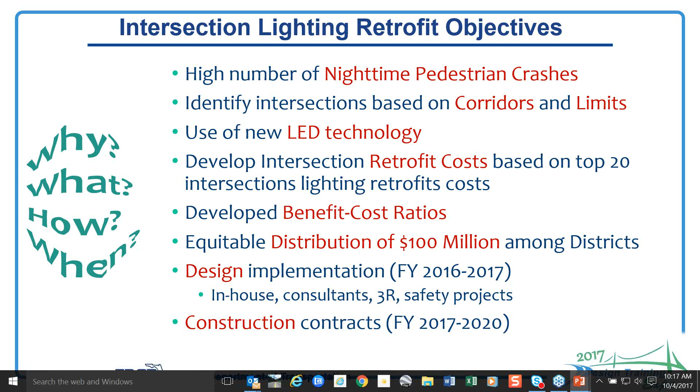that $100 million came about, and also both the design and construction implementation. This is a 5-year initiative. We are currently in the design phase. Some of these projects, depending on how fast we can put them out to construction, or if they are part of some existing 3R projects, we're going to be starting the construction phase. So that is in general what the PowerPoint presentation is going to be about.

On this slide, we can see the top 20 intersections with the highest nighttime pedestrian crashes. What we did, if you are from Florida, we have District 4, 5, 6, and 7. These are within the urban corridors. You can see the Tampa area, the Orlando, the Miami, Fort Lauderdale. All of these urban areas, they're in high density areas where there is a lot of pedestrian crashes.

We had identified 20 intersections. We collected data for 4 years from 2009 to 2013. And out of this, if you look on the right-hand side, we have the total number of crashes. All of these are pedestrian crashes that happen within a 24-hour period over 4 years. However, if we were to break down the crashes, we see that probably between 70 to 80% of those crashes are going to be nighttime pedestrian crashes. Between these crashes, we'll have injuries and we will have fatalities.

So just based on the data that we had collected for these intersections, and we worked with each one of the districts, we had determined that these intersections had a significant number of crashes. Now, the definition of a crash is that it is a random factor. And if you are familiar with the Highway Safety Manual, if you were to divide in terms of intersection crashes, perhaps on a year-time basis, maybe you will get maybe 3/4 of a person crash, 0.75 to 1.5.

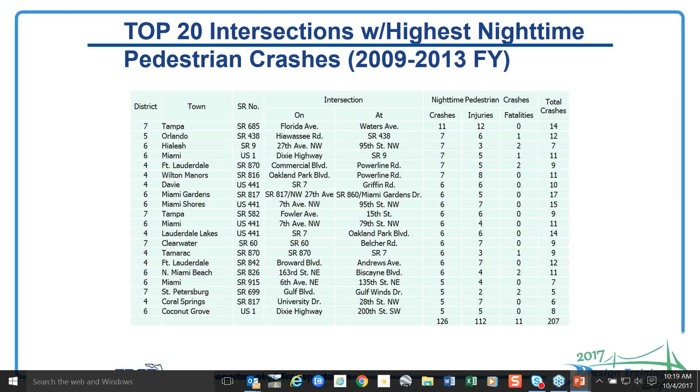So when we divide 11 crashes by 4, we know that we're getting more crashes than what is expected, and that there has to be something within the existing intersection that is more than just random crashes. So we concentrated on these intersections, and I will show you as we go through this one site why we needed to have the lighting.

So some of the data that we had collected in terms of the distribution of the pedestrian crashes, this is for the year 2013. Total number of crashes for the year was over 8,000. Then we have the injuries and the fatalities. Now these are all pedestrian crashes. However, if you can see the distribution for the fatalities that we have between nighttime and the daytime, 3/4 of the fatalities were happening during nighttime.

So we know that lighting, intersection lighting, is something that we definitely have to consider if we want to reduce our fatalities. And this is not very expensive to do. However, it has to be done, thought about, and implemented in a very systemic manner.

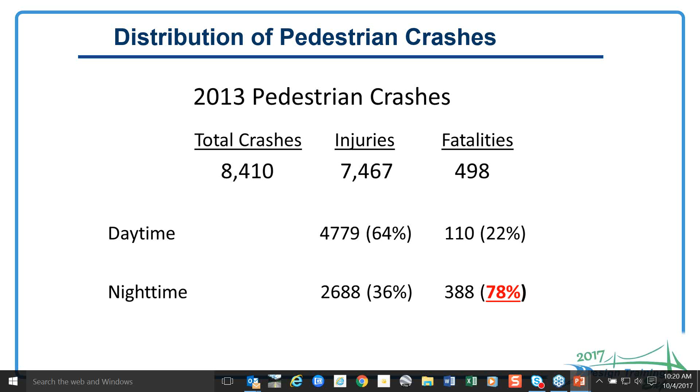So when we were talking about retrofits, the definition that we are giving the retrofits is that we have some existing signalized intersections. The majority of these corridors will have roadway lighting, but as I was mentioning, the location of the lighting was pretty much away from the intersection. So we needed to concentrate on how can we go ahead and provide lighting at the intersections.

And it was not going to be a full intersection reconstruction, especially if you have the mast arms and you need to relocate them just to comply with the new lighting design standards. So let's do the best that we can, but have some minimum illumination levels. And that's what we came about with. So as part of these 20 intersections, working with each one of the districts, we can see some of the things on average that we consider was going to be the scope of work.

Based on this average scope of work, we came up with an estimated cost. Now granted, at that time we were using high pressure sodium, so it's a little cheaper than LED. Based on our existing signalized intersections, we say on average we will need to install 3 new light poles, with an estimated cost of $4,200.

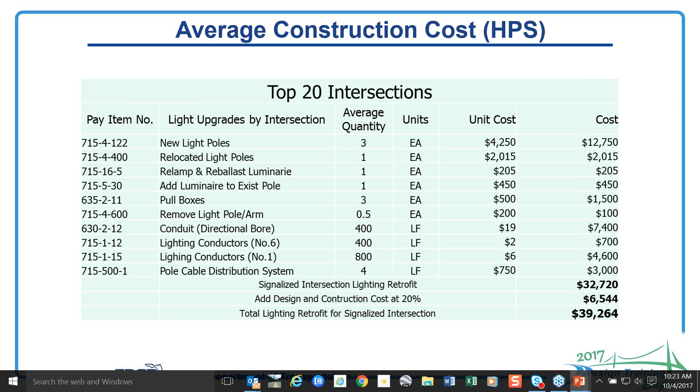So here you see our approach to this intersection. It was going to be very simple. We're going to be using some existing aerials, existing survey if we need it. As you can see, this is one of the intersections.

You can see some of the symbology. If you see the yellow luminaire, it means this is existing lighting. Now this one is close to the intersection, but it doesn't provide the illumination especially where we wanted to have it. So we have State Road 7, and also Griffin Road.

The blue legend is for the new lighting that we were providing. Now if you can see, it says we were attaching these luminaires to the existing poles. And these existing poles, this was based on span wire signal installation.

So we already had these strain concrete poles. We were attaching the luminaires to these strain concrete poles, and that was the best that we could do. We didn't install any new poles as part of this project. So this was using the high pressure sodium.

Also, I want to bring to your attention, if you can see the red dots and the dash lines, this is indicating where the pedestrians were crossing and where the crash happened. As we know, sometimes pedestrians tend to cross wherever they see a gap and not particularly using the existing crosswalks. So we do have crosswalks on all approaches.

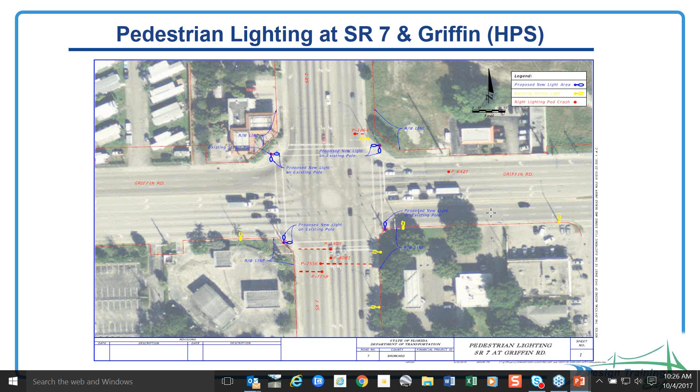So in terms of where we are right now for the lighting initiative, I want to give you the chronology of how we started. In 2014, we had programmed the top 20, and we were still using the old technology, the high pressure sodium. Then in 2016, as many states were going towards LED, we knew it was something we wanted to do for several reasons.

LED, and the technology, is more reliable. We know that for high pressure sodium, sometimes we needed to relamp every 6-7 years, and they're not as reliable in terms of the maintenance.

For a little bit of a higher price, which is dropping as technology advances, although LED is still a bit more expensive, we noticed we didn't need to change the LED luminaires maybe every 12 to 15 years. So in terms of equipment lasting and getting a better return on investment, LED was much better. It also provides a much brighter contrast because the correlated color temperature tends to be more bluish, a whitish color of light. That's a significant improvement, especially if you're using LEDs in your home or going through roadways or intersections with LED.

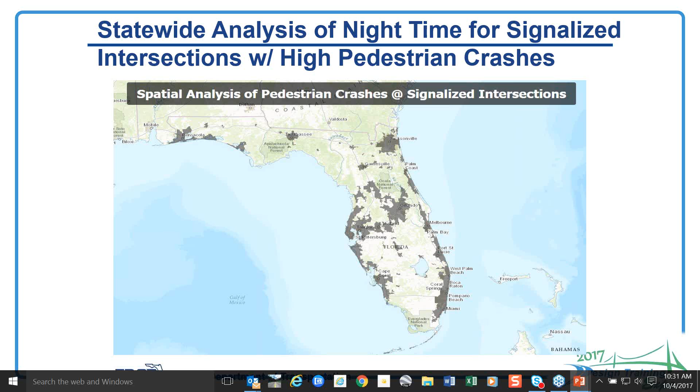We worked with each of the districts. They provided information to us. We had polygons and collected this data, put it into a GIS map, and created shapefiles. Based on this, we began a concerted, systemic approach to how we're going to address nighttime pedestrian crashes for signalized intersections.

If you have, let's say, 25 to 30 signalized intersections, but based on your crash data collection, maybe out of those 25, you only have 15 with nighttime pedestrian crashes. So the question is, do we only address based on historical information and put lighting at intersections that already have crashes, or are we anticipating crashes also at the ones where we don't have anything up to this point in time?

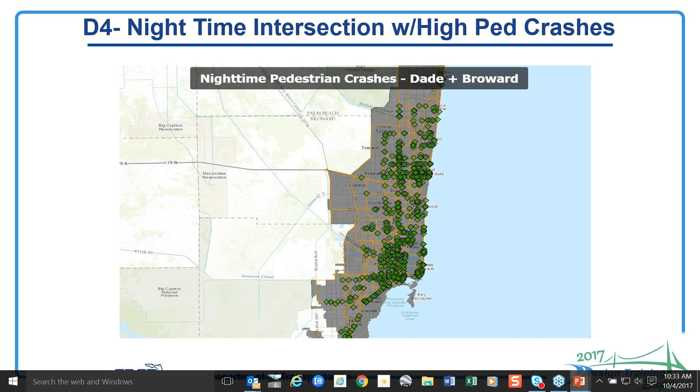So the idea for us, after several discussions, was that we wanted to use the corridor approach. We will identify the beginning and the end, the limits within a particular corridor, and then all the signalized intersections within that corridor will be retrofitted with the lighting.

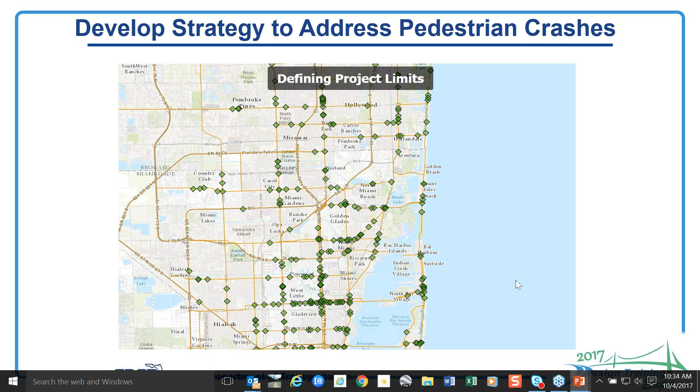So as you can see here, this is a close-up. For instance, this corridor has some intersections without it, this corridor has some more. So we had all the information to make the determination of where we wanted to go.

So here is a close-up of this corridor. We have the corridors that we had highlighted, and the key was to identify the beginning and end points of each corridor.

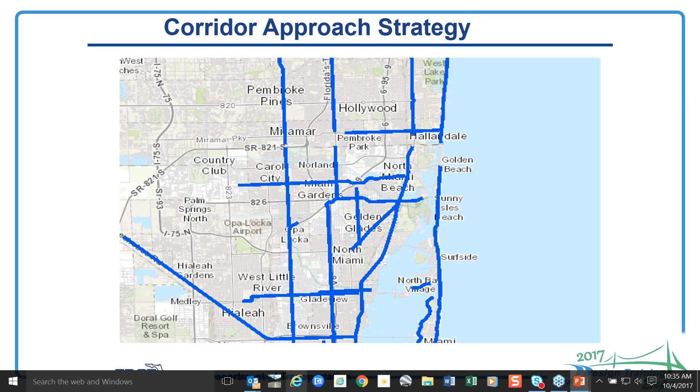So based on the data we had in terms of the crashes we're going to be reducing or eliminating, we proceeded to develop a benefit-to-cost analysis, which we'll talk about a little more. This was the data we used to develop the ranking of the system in terms of the benefit-to-cost analysis.

One of the things that was challenging was how we were going to be distributing the money. At first, we were asking upper management that we needed $50 million. Granted that this initiative is the first done in a systemic approach using the Highway Safety Manual in terms of our crash reduction factors.

So after we had the initial $50 million, management said they wanted to double that amount, so we came with $100 million. That was - so we had two variables that we could use in terms of prorating how we were going to distribute the money.

Initially, we were looking at the number of intersections. Now, if you are, let's say, District 1 and District 3, they are more rural. If you have District 4 and you have District 6, 5, and even 7, they tend to be more on the urban side, so of course they're going to have more intersections.

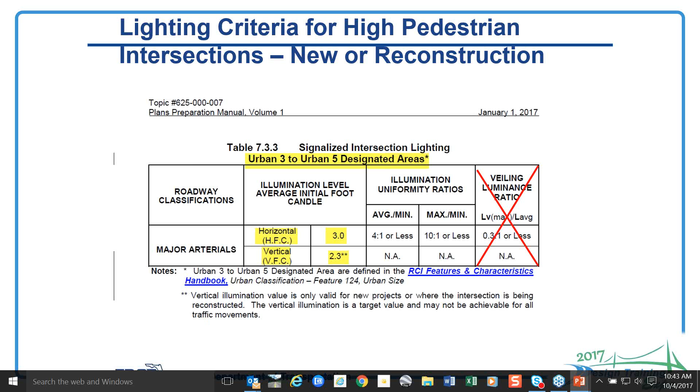So just for your information, in terms of where we place the location for vertical illumination, sometimes the lighting is not in the optimal location. We're going to look at where the optimal location for the lighting poles should be within the intersection. If the lighting is behind the pedestrian, a driver approaching the intersection might only see dark spots, silhouettes - no color, no facial features or recognition. So sometimes it's very difficult to recognize a pedestrian, even if there is lighting at all.

However, if the lighting is between the driver and the pedestrian, then we can say that there is positive contrast, and that's what we want. With the positive contrast, we can recognize the pedestrian as he is entering the crosswalk. So the vertical illuminance is what the driver can see as the pedestrian is walking, and the horizontal is just the driver looking at the pavement markings, looking at the roadway. So the whole idea was that for intersection lighting, we needed to have both vertical and horizontal illumination, which has always been done, but also to provide the vertical illumination.

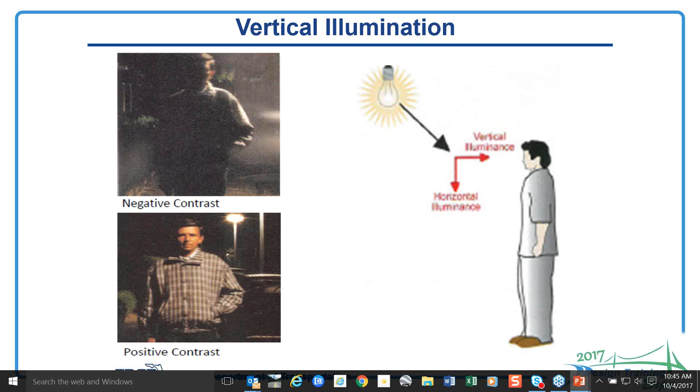So for the vertical illumination, we have three movements. As you are approaching - if you are traveling northbound and this is your intersection - there are three movements that a driver is going to be making. One is going through the intersection. The second movement is making a right turn connecting to the side street of the intersection, and the third one is making a left turn. So based on the different types of movements, if we are going to do a brand new intersection with the new illumination design criteria, we will have to place lighting at all of these locations.

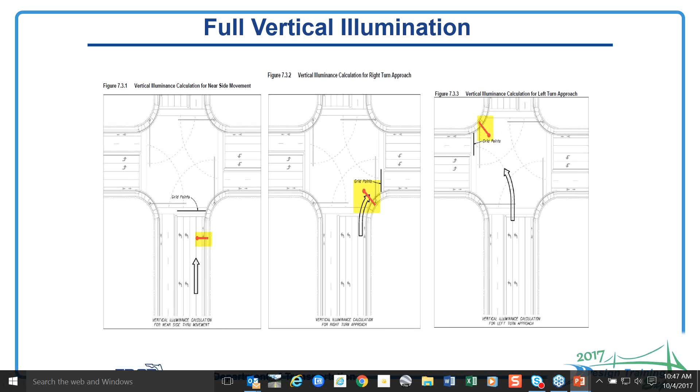So on a base case scenario, based on your main roadway and your side roadway, at a minimum you will need to have 8 poles. One is on the near side approach and also on the right turn approach. If you put these two at every corner, you are also going to be addressing the left turn movement for the northbound on the opposite side.

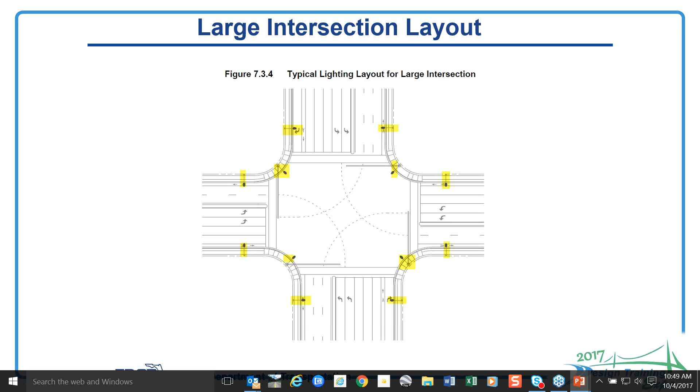However, in some intersections, since the vertical illumination is along the crosswalk all the way to the refuge or to the median island, depending on the width of the intersection, we might need to place an opposite lighting pole to make sure we continue increasing the illumination levels on the crosswalk. So this may require 3 lighting poles. On average, a minimum you might need 8, a maximum you might need 12 lighting poles to be able to address both the main and minor roads to have your full horizontal and vertical illumination levels.

So the lighting retrofit design assumptions - this was something that we had to come up with just to make sure. We knew that on existing conditions, some of these corridors already had lighting, so we needed to do the best that we could because we didn't have unlimited funding. Our estimated average cost was 50,000 - we increased the 40,000 to that by 20% because of the new LED technology.

So the assumptions were that retrofits would be done for existing lighting at signalized intersections along corridors. The estimated average cost was 50,000 per intersection, which included design, construction engineering and inspection, and the actual construction cost. The luminaires will be LED.

As part of this process, we developed new specs. We talked to several manufacturers and to the industry, because there is not a standard document - states throughout the nation are developing their own specs right now. So for Florida, we developed our own set of specs. We also had to go through an approved product list process for the various luminaires, whether for conventional lighting, high mast, sign lighting, or underdeck lighting at bridges. I was part of that process.

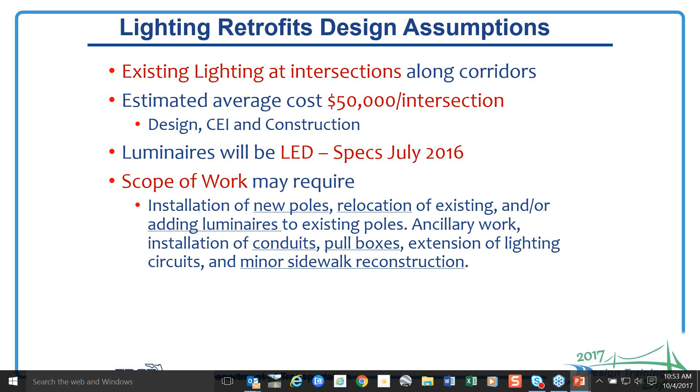Some of the other things: minor utility coordination - in some instances we have overhead lines and some conflicts with the lighting poles, underground utilities, placing of the poles, maybe some utility conflicts. We were not expecting to have any utility relocation, whether overhead or underground, for the foundation of the lighting systems - just to use our lighting standards, not shallow foundations, but our cylinder concrete foundation.

The other understanding was that these corridors already had existing lighting circuits with roadway lighting, so we could tap into the existing lighting for the corridor and just make those connections. Voltage drop was going to be minimal, and no additional lighting disconnects or power source was going to be required.

Some modifications are in terms of the maintenance agreements, whether with local agencies or utility agency owners. In Florida, the local agencies or utility agencies are the ones that maintain our systems. So as part of the maintenance agreements, we pay on average - I think $250 for maintenance and equipment upgrades, $250 per year per luminaire. I might be wrong on that, but part of that, 55% of the cost was labor, and the other 45% was equipment maintenance.

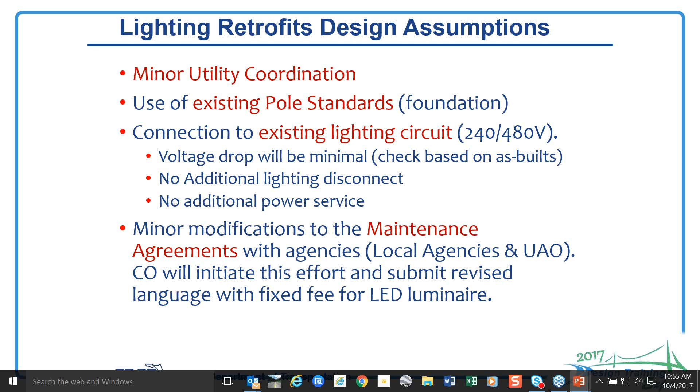So with the new LED luminaires, we knew that the price is going to be changing. So we are working now with our municipalities just to make sure that as we are drafting the new maintenance agreements, we're equitable in terms of when the luminaire systems are going to be replaced and how much money for the initial cost.

So this has been also part of the process. For the lighting retrofits, now let's talk about retrofits. For retrofits, it means that we have the existing signalized conditions, there's some lighting along the roadway, but we are going to provide some additional lighting.

For the horizontal illumination, we went from a 3.0 to a 1.5. So we reduced it in half, but still we know that the 1.5 is meeting the roadway illumination levels that we have for our existing roadways. So in essence, we just want to make sure that we comply and that we are providing something that is as good as what we have existing.

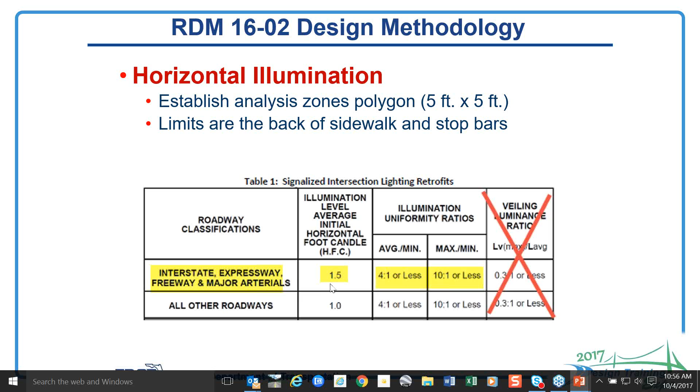I will show you, we established the analysis of the lighting zones via polygons, and the illumination points were on a grid 5x5, and the perimeter was at the back of the sidewalks and the stop bars. But this is the criteria. So for the retrofits, it is relaxed.

Also for the vertical, what I was showing before was that we were accounting for the three movements as a vehicle is approaching the intersection, the through, the right, and the left. So we decided that because the number of luminaires required for the three movements as part of the retrofit was going to be challenging, our main concern was for the near side approach. So we decided also to relax the illumination level between 1 and 1.5, and not the 2.3 that we had for all the approaches.

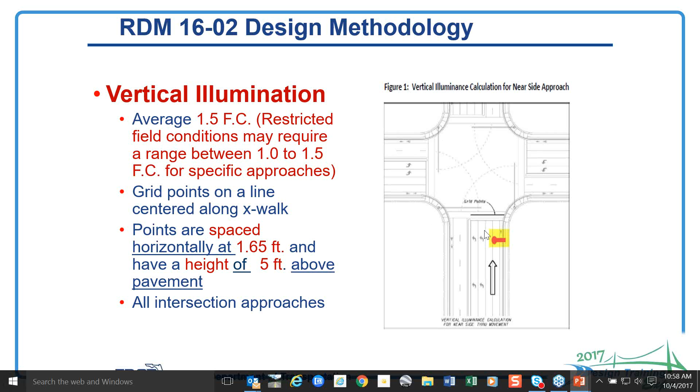The grid spacing that we have is at the center of the crosswalk from the curb ramp all the way to the median, and the spacing horizontally is 1.65 feet with a 5-foot height. For all the approaches, use the near side, and that was the illumination level. So definitely making sure that at the very minimum, we are addressing as the vehicle is approaching the intersection. Once they are on the intersection, the existing illumination levels will be adequate enough for right and left turn movements.

The RDM, if you don't know, this is the acronym for the Roadway Design Memorandum. This information was complementary to the information that we had in our plans preparation manual.

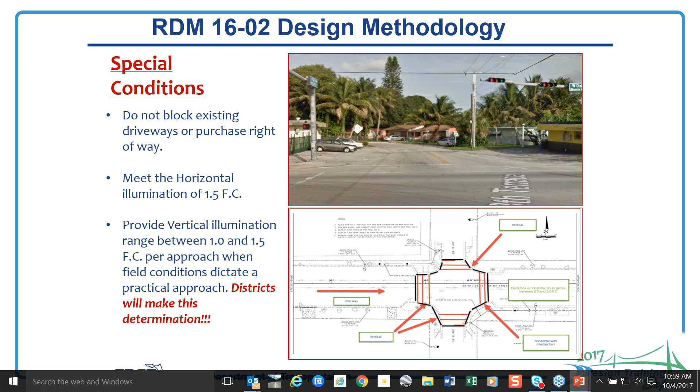Apparently, this is some existing parking that is happening, so the optimal location perhaps might not be as we would like because of the existing conditions, and it has to be further away from the intersection. So that is the message we were trying to tell designers, that you just look at your intersection and work within the restrictions to make sure that it's based on engineering judgment.

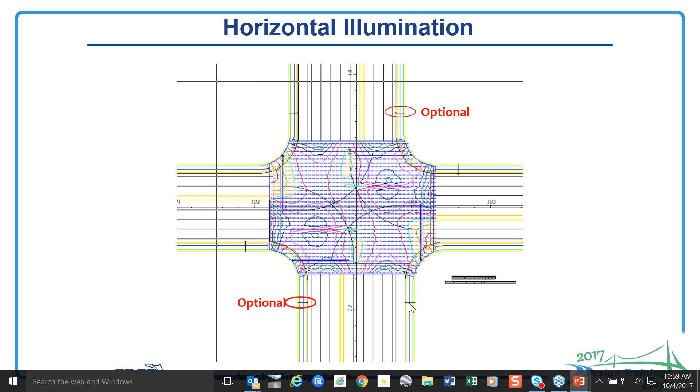So for the horizontal illumination, as you can see, we have the perimeter for the horizontal illumination. A minimum, as we were saying, for the retrofit is that we will have, at the very minimum, 4 poles, and those are on the near side approaching. 1, 2, 3, and 4. So we went from a minimum of 8 poles for a brand new intersection to a minimum of 4 poles. However, depending on the width of the actual major roadway or minor roadway, you might have to place an optional pole to make sure that you are lighting the intersection for the crosswalk.

So we have the perimeter. We use AGi32 software. We just place this polygon and say calculate it based on a 5x5 grid within the polygon, and then we get our design calculations.

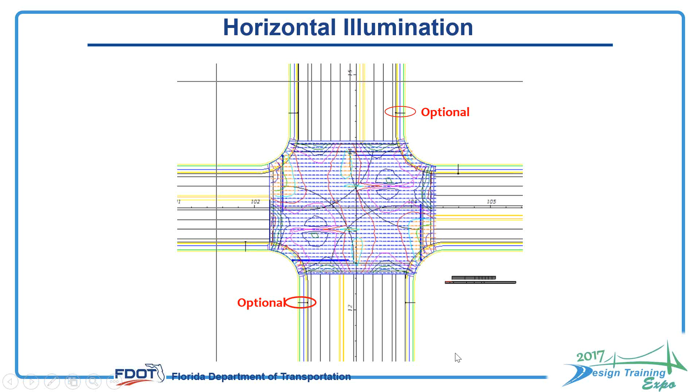For the vertical illumination, we will have a linear grid for each approach that we have, and we need to include some design criteria based on the traveling speed and the stopping sight distance. If you're traveling at 45 miles per hour, a driver at this location needs to be able to see a pedestrian beginning to cross the intersection within the crosswalk, but also have the illumination levels at 1.5, minimum 1.0 foot candles.

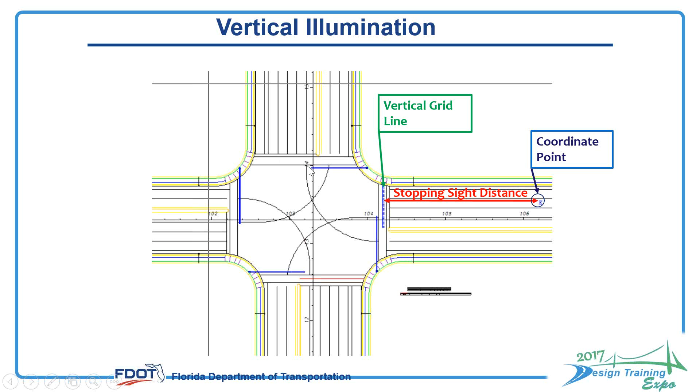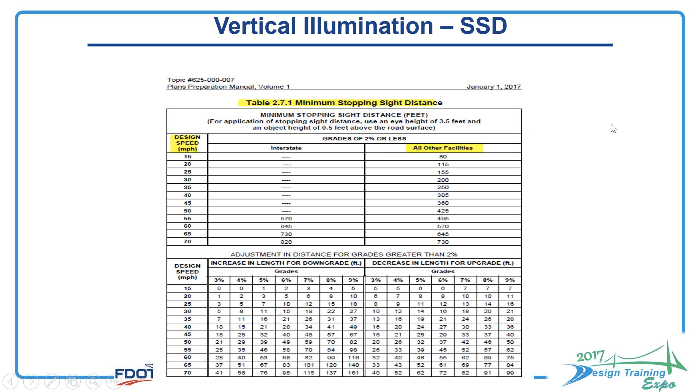So we do it for all the approaches at each one of the crosswalks, and we'll be looking at some examples. Based on the design speed—and we assume the design speed was the posted speed, or you can use the posted speed—you'll have your traveling speeds, and then your stopping sight distance. You'll input this into the AGI 32 software, and this will help you develop your illumination levels for the vertical grid line.

So, in summary, what was the design intent? We knew that the information we provided in the plans preparation manual for new intersections was clear, but it wasn't as clear for retrofits. So we developed a training workshop to go to each district to convey this information, because it wasn't clear. As the roadway designers coming up with these alternatives, we sometimes had a hard time explaining the difference between a new intersection versus a reconstruction and the design criteria.

We were asked by the districts, and we concurred, that it was best to get all the people participating—not only the DOT internal engineers, decision makers, and project managers, but also the consultants—to make sure everybody was clear, because we needed to move at a fast pace. We had $100 million and needed to see progress. We needed to hit the pavement running, so we didn't have a lot of time once we began this process to clear up questions that could have been addressed earlier. That's why we initiated the training program 2 or 3 months ahead of time, to make sure everybody was on the same page.

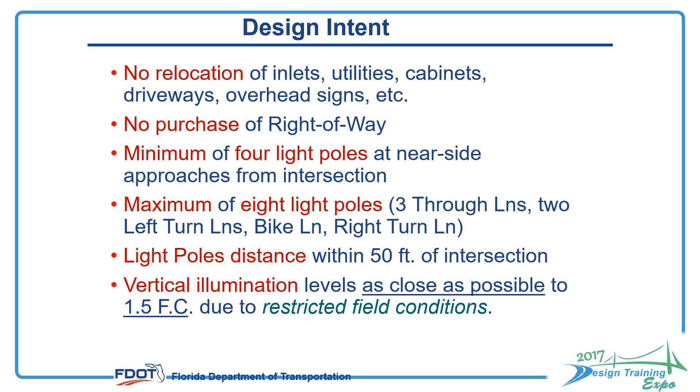At a very minimum, you'll start your design having the light pole placement for the near side approach within 50 feet of the intersection, though that depends on existing roadway constraints. We wanted to achieve, as much as possible, the 1.5 foot candle vertical illumination. However, we knew that sometimes it would be daunting just to meet 1.5, so we decided we could relax it to a bare minimum of 1.0 foot candles. The other assumption was that in terms of cost, we'd be connecting to existing circuits, so we didn't have to incur additional infrastructure costs, and we'd be coordinating with our maintaining agencies on luminaire types, power, and maintenance fees.

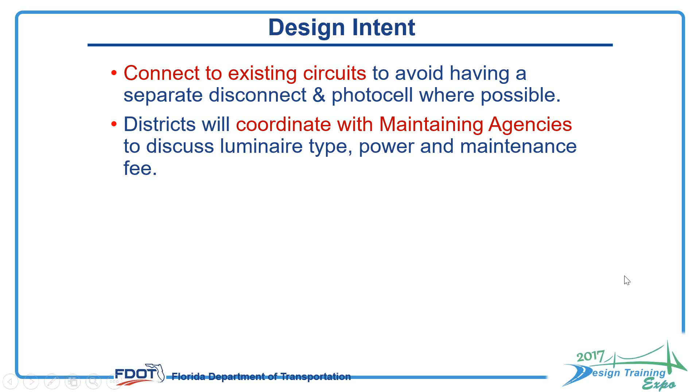This is part of the existing and continuous process as we move toward the implementation of this initiative.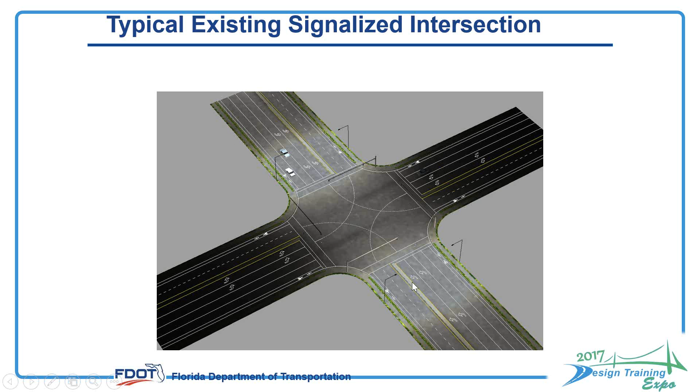So based on the new intersection design criteria and the intersection levels, if you did not have any lighting or luminaires within the side street, we needed to also place it on the side street. So there was a lot of work. For the retrofit, at a minimum, one lighting pole within each approach that we have, and at a maximum 8 lighting poles.

If you go to the DOT standard specifications, we developed section 992, and I believe we have the 2017 lighting specs out, but there are several things I want to highlight. All the lighting luminaires that we're going to use need to be approved as part of the APL, the product list, meaning we have already worked with the manufacturer in terms of what we need, and they already submitted their products meeting every requirement within our spec. There's a series of tests required, like the IES LM80 test.

The driver should have 100,000 hours, ready for 100,000 hours of operation. The circuit voltage was going to be 480. In terms of the luminaires, the surge protector should be 10 kV, 10 kA, and also we wanted a warranty, a protection for the entire luminaire, not just for the LEDs, but for the driver and for the surge protection, of 5 years.

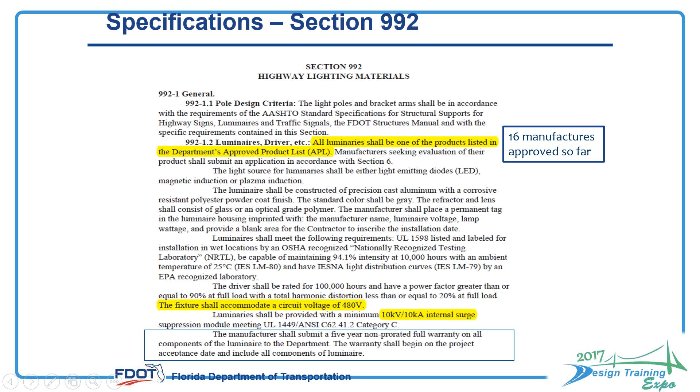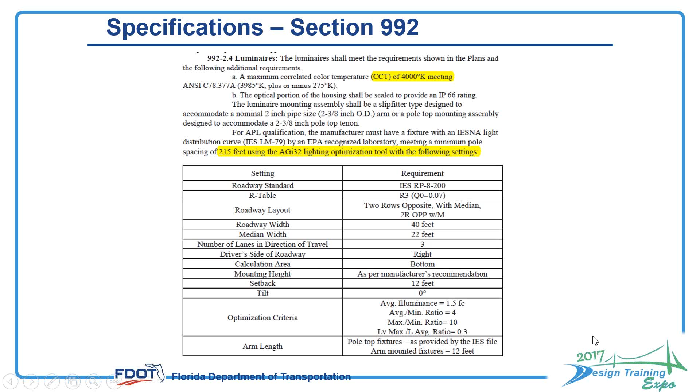Here you can see in terms of the correlated color temperature, that's 4,000. We are trying to go to a lesser correlated color temperature because of technology. So the 4,000 is more bluish; if you reduce that temperature, you tend to go more into the orange. Also, for roadway spacing—this is for roadway lighting, not intersections—we have increased this spacing. We talk about the AGI 32 optimization, and these are the roadway standards and what we needed to have as part of this requirement. So if you have questions, you can go to our specification book, section 992.

Now, there are some instances where we do not have enough information in the specs, and this will require a technical special provision. Part of that is when you have decorative lighting. Our specs were mainly for conventional lighting, the standard cobra head lighting. But if you have the specific requirements for decorative lighting systems, then you will have to submit some additional information.

So we talked to the districts and provided the guidelines for a technical special provision. Of course, it has to be reviewed by each district, but some of the minimum information we require is product information, the type of luminaires, the type of driver, making sure all of these comply and match what we require in our specification book, the surge protection, the assembly, the warranty, the method of measurement, and the basis of payment.

This information will be submitted to the project manager, the district project manager, and will go up the chain to the central offices. At this time, I believe Ed Cashman, our lighting engineer, will review to make sure that what is being submitted as part of that project complies with the actual specs that we have. So this will be for the decorative lighting.

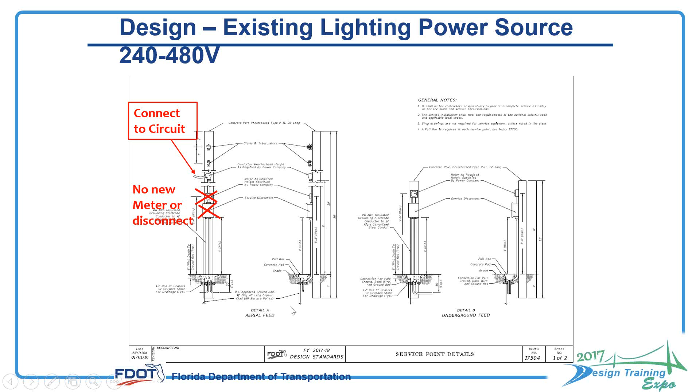All the designers needed to have as-builts of the power source and the existing connection. That was part of their work.

Now, in some instances, depending on if we did not have any lighting within the corridor, or if we had lighting but a different maintaining agency, like the signals - because all of these are signalized intersections - if the signals are maintained by one agency and the roadway lighting is maintained by another, then we needed different connections and disconnects. But on this particular case, there was no roadway lighting on the corridor. So the question came about: do we need to provide a new power source, or can we use the existing power system, which is 120 volts for the signals, and just connect to that system using our proposed LED luminaires?

So we came up with some standards: wherever you don't have existing roadway lighting, just connect to the existing lighting signal system, with the breaker and photo cell. And we provided these design standards.

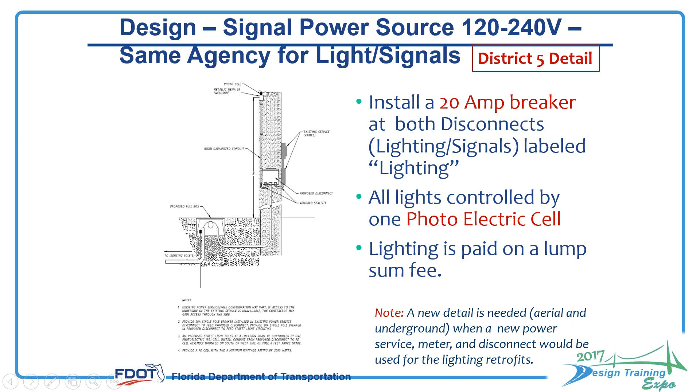Excuse me, let me just take a water break.

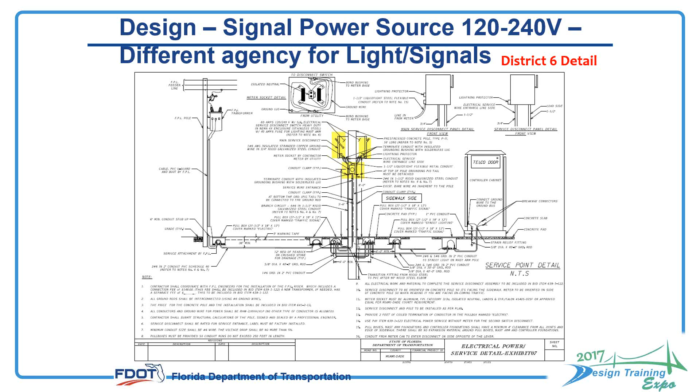District 6 also has their own standards. As we started looking at the different types of scenarios and working with the different districts, we are combining and putting all of this criteria into the new PPM, which we're going to be developing very soon. At least we have all the information available, the minimum requirements, so each district can go ahead and use this additional information.

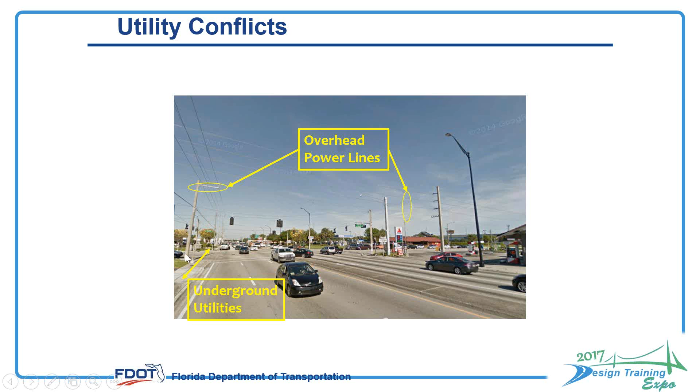The other challenge we had is that our standards for the luminaire poles were pretty much between 35 to 50 feet high. The upright of the pole was mostly 30 feet high, and depending on that - let me go back to the slide - in some instances we needed a special design for the lighting pole to make sure we're not hitting anything, and there's a clearance we must maintain. I believe that's a 10-foot minimum clearance with electrical power lines. So definitely we need to consider the overhead utility conflicts.

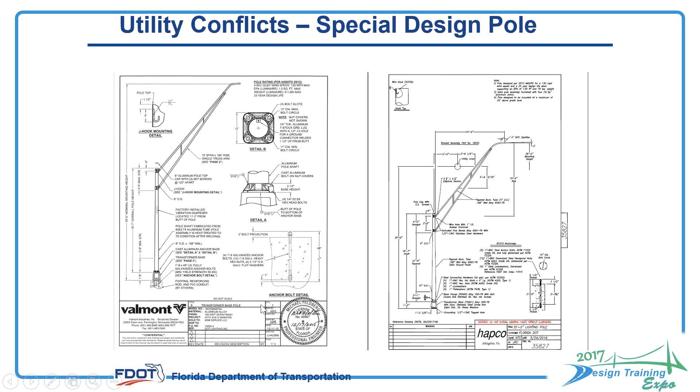We had some manufacturers who submitted different combinations for the upright of the luminaire, as well as for the angle of the mast arm, and so on and so forth. So these are just some shop drawings submitted by 2 different manufacturers, Valmont and Hapco.

So in our bulletin, and coming up, there were some variables that we needed to provide. What is going to be the pole height? So this is the pole height, and it can vary from 20 to 35 feet.

This is a variable that, as part of your design, whenever you have a utility conflict, you must indicate in your plans. Also the arm length—this is the arm length, the horizontal distance from the upright all the way to the center of the luminaire, and it will vary between 8 to 15 feet.

Now the pole height, the mounting height. The mounting height is this distance, from the roadway surface, and this is from the edge of pavement. You have your traveling lane, and this is the edge of pavement. So what is this mounting height? We want it to be 45 to 50 feet. We're saying 30 to 50 depending, but for the roadway, most of our designs are a minimum of 40, and we're talking about 50 feet.

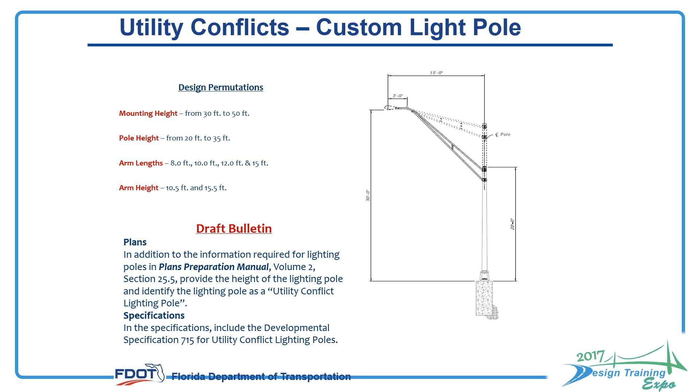Also the arm height, this distance here. How much it is will be based on the angle of the arm height and also the length of the luminaire arm. Based on this information, we provide these variables to the contractor, and they will go ahead and design this luminaire for us, just to make sure that we are meeting our clearance from the overhead utilities.

So we have it along this corridor, based in District 1. We are using this model or approach for our intersection utility conflict poles.

In terms of the contract negotiations, we talk about some of the issues—how do we approach this dealing with the districts? Most of these designs, in 75% of the cases, are being designed by consultants. So we want to make sure that we provide all the information that is needed, but also that we do not go overboard, given whatever existing information and survey we know of.

So do we have an existing survey? Sometimes we ask, what kind of aerials can we use? I know in some instances we use imagery from Google Maps. It's not rectified, it comes at an angle, but if you can do some field measurement to complement the Google aerials, that is fine, if it works for the scope of work. At the department, we also have in our survey section the FDOT APLUS aerials, which have been rectified. They're very recent, and we continue updating them. You can use that information statewide. So if you are working for a municipality, you can download this, or use some new survey. We're just using as much of the existing information as possible. This is the link to the website where you can get this aerial information.

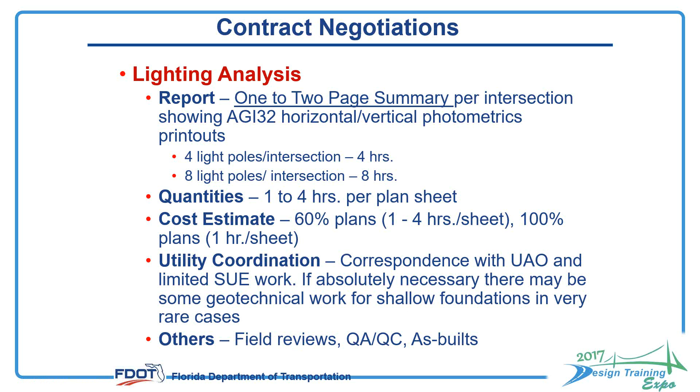In terms of developing the lighting plans, perhaps a key sheet. Remember this was going to be a corridor approach, so if a consultant had a contract, there was going to be more than one intersection - as many as whatever intersections were part of that corridor, and if there were several corridors within the contract to the consultant.

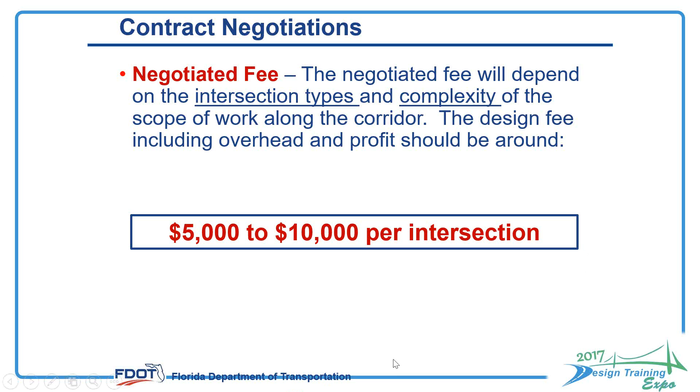We indicated that on average, a negotiated fee per intersection - so if you had a corridor with 10 intersections, your design fee could be as low as $5,000, as high as $10,000. However, this is average, and we're giving a range. Some were less than $5,000, especially if the utility companies were doing all the work and we were just providing a schematic drawing. In some other instances there were more, maybe double, $20,000. But that is how we estimated this cost, and that's what we use for our benefit-to-cost ratio.

Okay, so this is a very good point in terms of the intent. So how we came about the initial 20 projects - we knew based on science that intersection lighting works, and we were going to reduce the number of nighttime pedestrian crashes. Now, based on those 20 projects, we looked at how we could go ahead and use that approach statewide. That's why we're also using new technology, how we identify those intersections, those corridors, how we prioritize those corridors, because the money is not sufficient.

The $100 million only addresses 25% of all existing signalized intersections. So based on that, the districts took their funding based on the allocation, and they identified their priority corridors, and they're working now, as we say. Some of them are finishing their first design projects and going to construction. Some are still working, so this is a continuous process for the next 3 years. We hope that within the next 3 years, all the intersections will be undergoing construction and have it completed by 2021, 2022. So I have 3 examples for you to give you some idea of how we approach these intersections.

Dennis, if you can let me know maybe 10 minutes before our hour, I can continue talking. I don't think it's going to take that long, but I just wanted to give you some idea how we approach this, and these are some real life intersections.

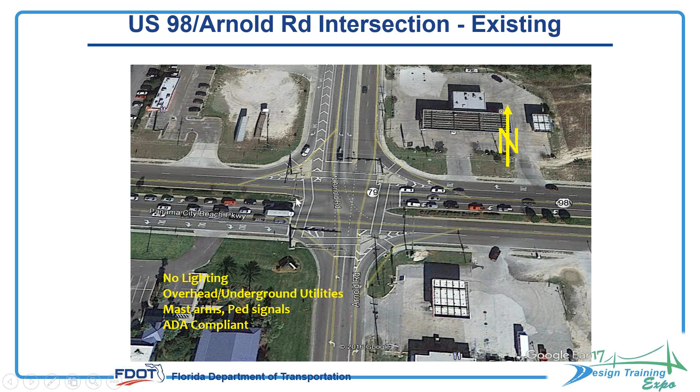So conditions were very different in terms of what we needed to do. In terms of the lighting poles and illumination, both horizontal and vertical, was going to be critical. This was a project that needed a retrofit. They wanted to do a widening, provide a dual left turn for the westbound movement, and also widen for the right turn. So they needed to realign the through lanes. For these intersections, they also wanted to provide a triple left for the southbound.

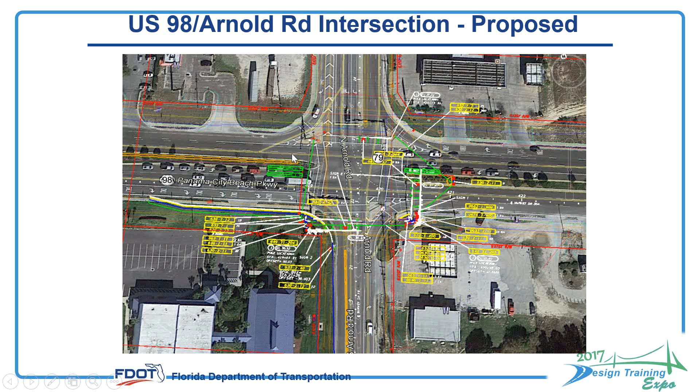So this is the pay items. They had to relocate and put a brand new mast arm at the northeast and at the southeast corner. Part of this was going to be the reconstruction, and also they wanted to provide lighting as part of this project.

So this is some of the pictures, as you can see, for the eastbound. They were going to be widening, providing a dual left turn, so they needed to relocate this right turn lane. Also, they were going to be relocating both of these mast arms.

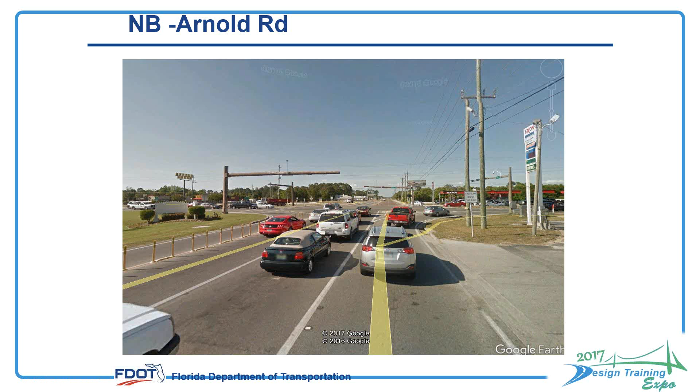Also for this right turn lane, they're going to be relocating, as we mentioned. This is for the side street northbound in Arnold. So a lot of conflicts in terms of this realignment of the lanes, access entrance to the gas stations and the driveways. So where was going to be the optimum location of the proposed lighting poles that we had?

This is for the westbound. There's an existing lane configuration that was going to be the same, but where do we place the pole? Do we have to provide it? Are we going to be impacting the existing driveways? Critical for the existing locations.

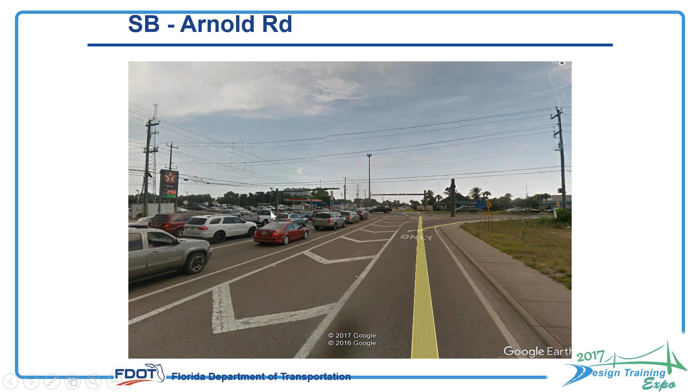And then this one is for the southbound. So we were providing an additional left turn lane. So how was this going to be impacting in terms of the overall luminaire placement?

So as part of the intersection, this is a tentative design. I don't believe that this is the final outcome. So what we did was that instead of the minimum 4 poles, what we provided was 6 poles. At the bare minimum, we know that we have 1 pole for each near side approach, but also we had opposite poles. For us, we were not getting enough illumination for this crosswalk, so we had an opposite pole. And also for the width of these dual left turn lanes as part of the widening, providing that additional left turn lane, we placed another pole.

This is your horizontal boundary for the horizontal illumination. And then these lines that you have for the crosswalks for each approach are for the vertical illumination.

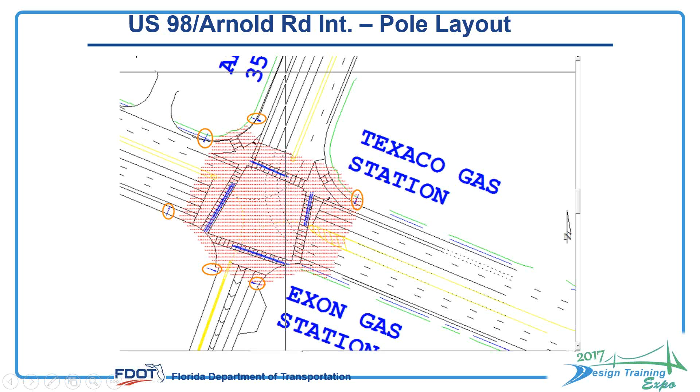So after we did the calculation, for the horizontal, based on the number of poles and on the locations, the average was 1.78, which was higher than the 1.5 minimum. So we achieved our illumination levels. And then for each one of the approaches, it varied on average between almost 2 and 1.6 — this one even was a 2.5. So it was very successful.

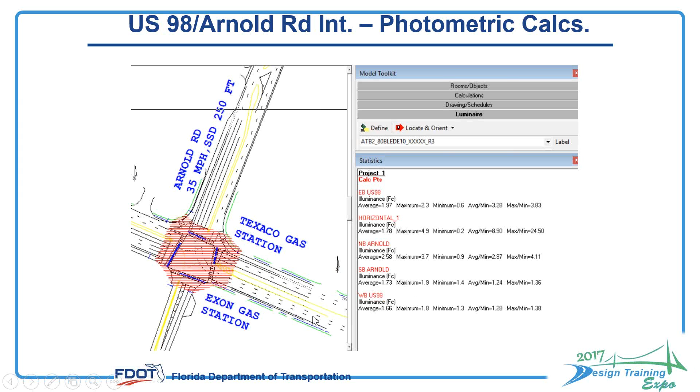There were other considerations or other variations of this design, but this is what we recommended based on the proposed relocations.

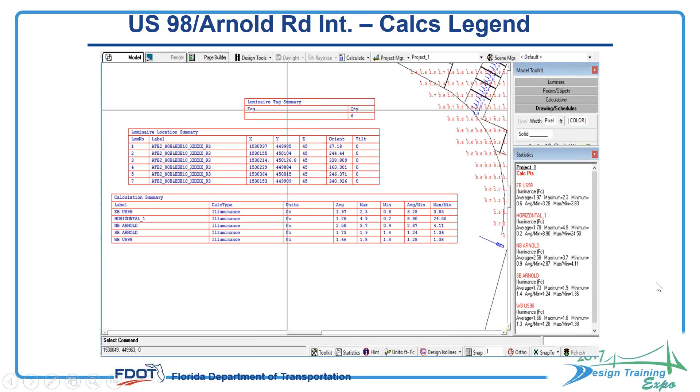This is what AGi32 provides for you. So you have these printout tables, and you can use this also as part of your documentation. Something very simple that will give you all your locations, your average, your max and minimum, your foot candle levels. Also, it will give you your coordinates and orientation with the height of the pole that you were proposing. So very in-depth and detailed.

I have two more. In District 6, the Overseas Sombrero intersection. This is a very good one in terms of some conditions. The main highway is the Overseas, Sombrero is the side street, so this can be considered as a T intersection.

However, you do have a driveway for a museum, which we needed to consider. There's a gas station on the southeast corner, and a Bank of America. There are 3 lanes traveling eastbound with a left turn lane. There are 2 lanes traveling westbound with a left turn lane, but also we do have a bike lane.

So we have a bike lane, but also there is a multi-use trail as part of this, so it's very different circumstances. The multi-use trail is on the north side of the intersection, and you can have multiple users, whether people walking, on strollers, or jogging, or bicyclists can use it, as well as other riders can drive on the bike lane.

Conditions were there's only 3 existing crosswalks that we have. There's not a crosswalk on the westbound approach. So there's 3 crosswalks: you are crossing the south leg, you are crossing the east leg, and you're crossing the north leg.

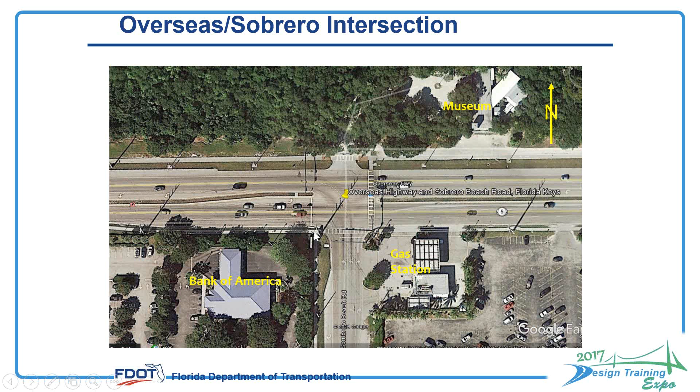As part of the lighting, I also want to tell you that there is some intermittent lighting through the corridor. As you can see, these are lighting poles, and there is lighting on this power pole, but there was not intersection lighting. So here you can see a lot of overhead lines. There's no lighting approach, overhead utilities, underground utilities.

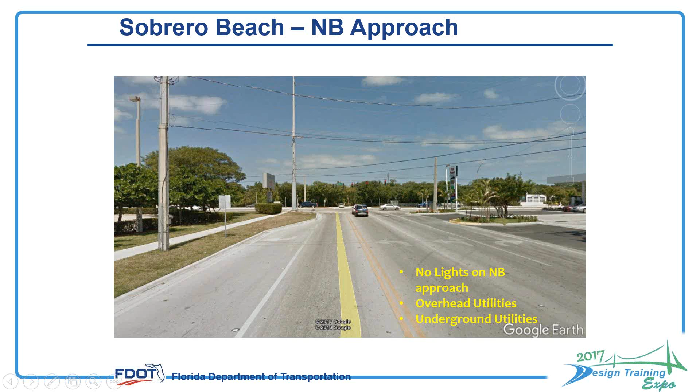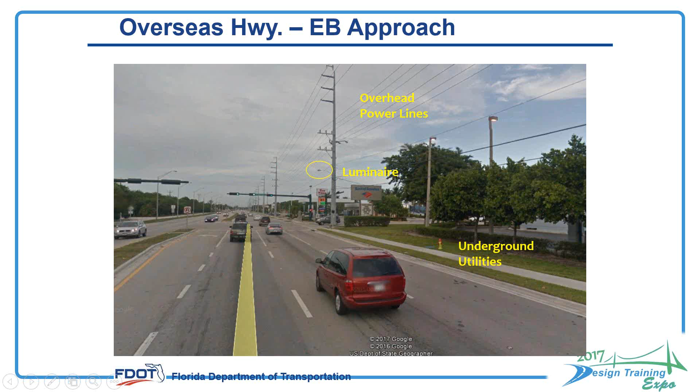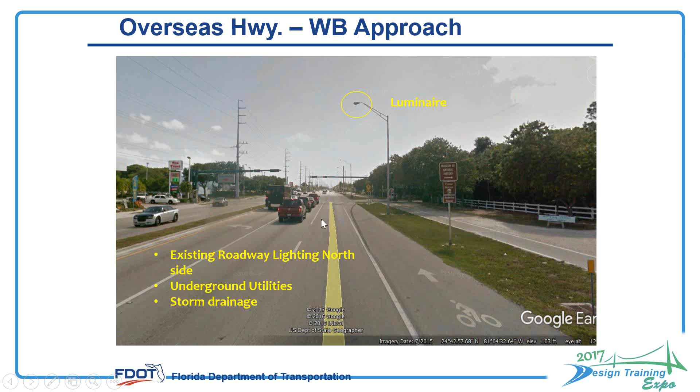In terms of the westbound approach, there's the existing roadway lighting. As you can see, 2 through lanes, the left turn lane, you have a bike lane, but also you have the multi-use trail. So this is an open drainage system, and this is the driveway that is used for the museum.

In terms of the ADA improvements, as we said, part of the lighting retrofits did not account for ADA improvements. All of these approaches had the pedestrian push buttons and the detectable warning systems. This is a directional curb ramp. If you really wanted full ADA compliance, they would have a dual access, not with the directional flare, but with the combined flare or separate crosswalks. But this was not part of this project. We have the pedestrian push buttons.

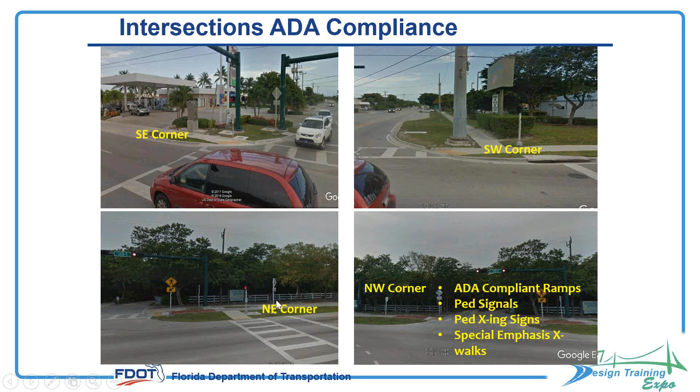So the type of luminaire that they were recommending was the ATBL. We used our analysis—I don't believe that this is the ultimate, but we provided an approach light in the landscape area. This is the driveway entrance. So there was a landscape entrance.

So we said, well, we can talk to the gas station owner and just do some landscaping modifications and provide a luminaire here. We just replace the tip on the westbound approach and change—don't provide a pole here, just put an LED, maybe relocate this pole to this location to be within the 50 feet and provide a brand new luminaire that will serve this crosswalk. There are many ways that we can skin this cat, but this is what we recommended.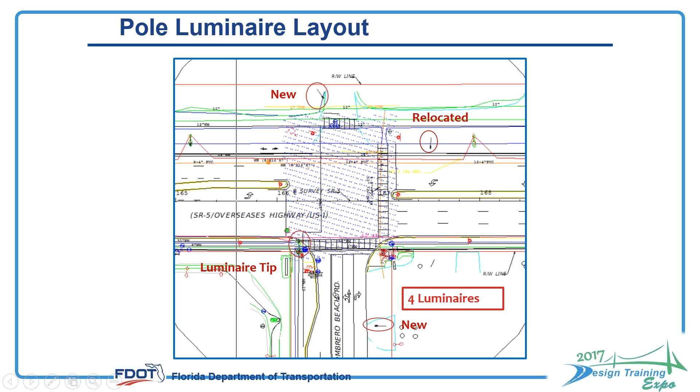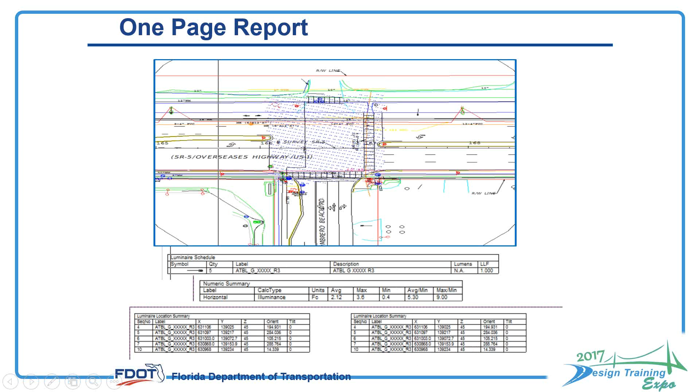This is our horizontal illumination grid. So based on this, for the average illumination, we had 2.12, which was much better than the 1.5 that we were requiring. This shows you the orientation and locations of the luminaires that we provided.

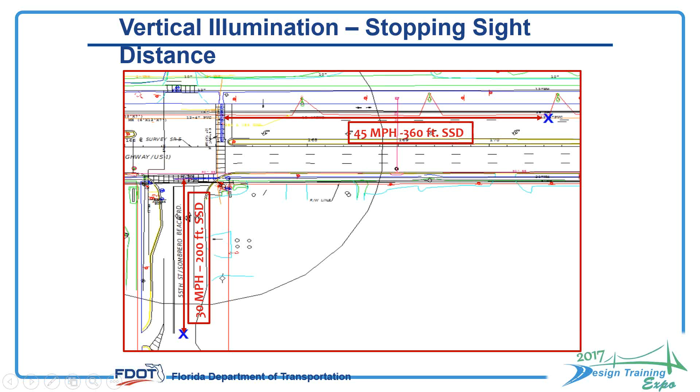Also, we used for the vertical illumination the stopping sight distance—it was 45 miles per hour, 360 feet stopping sight distance. That information is input in your AGI. So this is some of the information that we had.

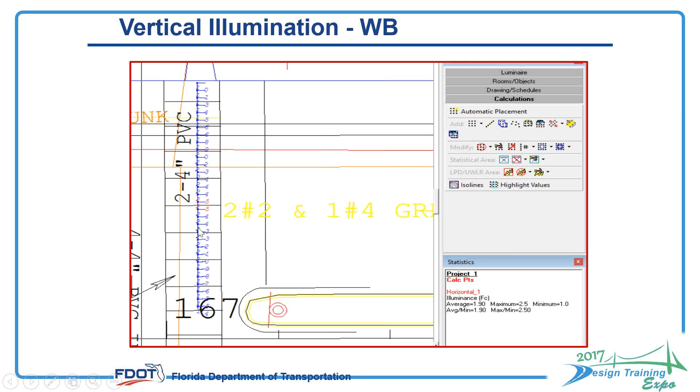So for the horizontal—actually this one says horizontal, but this is for the westbound approach—we say that the average foot candle was 1.9, and you can see the different values. It goes from 1.0 to 2.5, then on average. So this is what we did for this intersection.

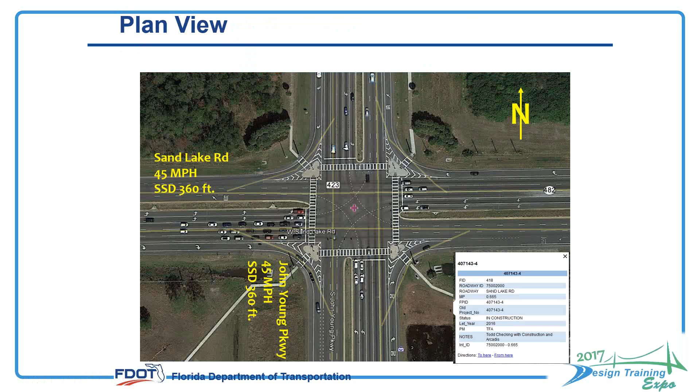And the last one, this one is in District 7—no, District 5. Well, do I have? Let me just go to District 7, I guess. We're not gonna have time. I just want to finish with District 7 with the slides. So pretty much in this presentation that I have, it has been modified, so I will submit this presentation to Dennis so he can update it.

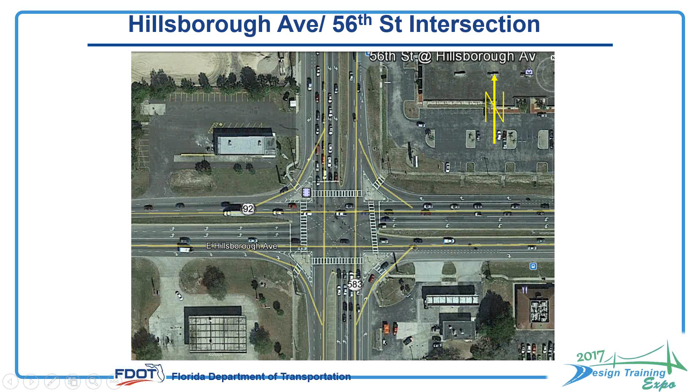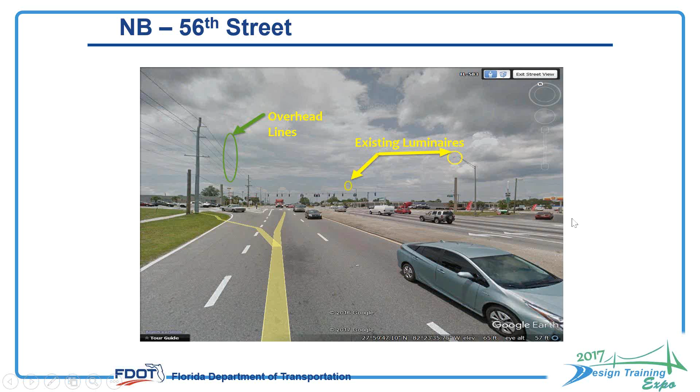So we do have overhead power lines. We do have existing luminaires. As you see, we have the span wire signal diagonal assembly.

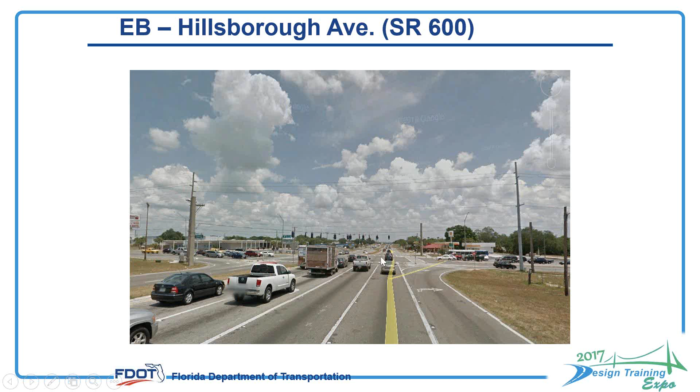So what is going to be the best locations for the proposed luminaires? Are we going to be using the existing signalized strain poles or not? So all of these things were part of the consideration.

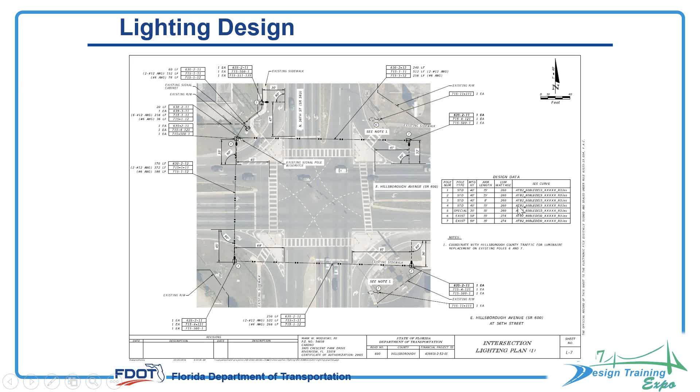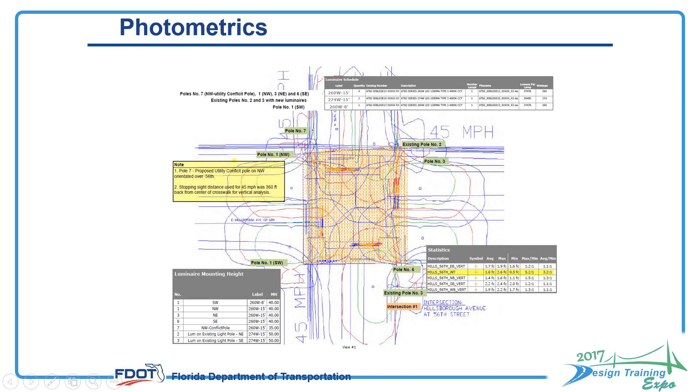Overall, this was a very successful project. I just wanted to give you a brief overview. We had 4 examples, but we could only talk about 3. If you have any questions at this time, I will be happy to answer them. I know there's a lot of material to digest, but thank you very much.